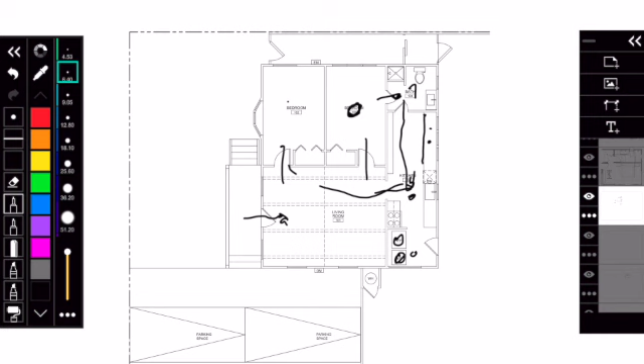So we're going to fix all of that, and here's what we're going to do. Let me make sure I can turn on the right layers here in the right sequence.

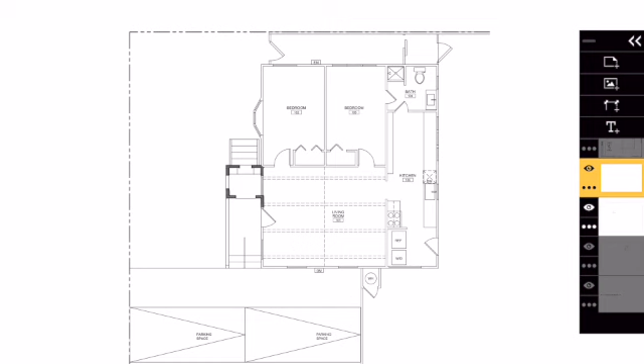The first thing we're going to do is fix the entry. We have a nice sized porch, and we're going to build out onto the porch a little bit and create an entry vestibule. So we'll come up the steps onto the front porch and right into the front door. The idea here is that there's a seat with storage on either side, so we come in, there's a place to dump the shoes and the backpacks and the keys and all those things, and then we enter the living space.

Okay, so that's the first problem solved. The next problem, let me do this in sequence... okay, found it. Here's what we do with the rest of the house.

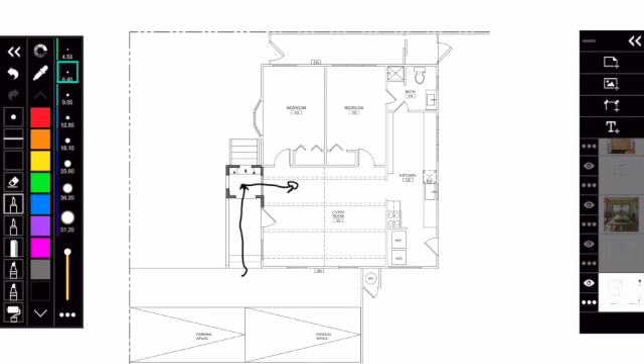We're going to bump out the back. If you see this pale blue line here along the back, that's the footprint of the existing house. So we're going to bump out this way, and we're going to bump out to the back. Fortunately, like I said, they have a nice size lot, and we have room to do this.

So working from the front, we come in the front door. This allows us to flow straight through the house to the backyard. We also took the bedrooms - again, this is the existing back wall - we took the bedrooms and the bathroom and filled up this footprint of space.

And we reoriented the bedroom doors, so they don't enter straight into the living room anymore, but they are around the corner, giving them some privacy.

So there's a little bit of a vestibule here between the bedrooms. You come in here, you can go to this bedroom - these are the boys' rooms. And then we also relocated the bathroom, which was previously up in this corner, and put it in the middle between the bedrooms. I'll get rid of this because this is getting messy.

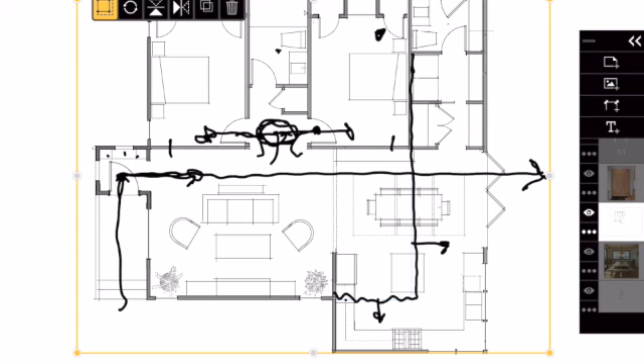Put the bathroom between the bedrooms. This gives a place where guests can use the restroom without having to go through the kitchen and dining area, and it gives the bathroom some privacy. I understand it's not a whole lot of privacy, but we're dealing with a really small house.

Even with this addition we're doing, we're at about 1,100 square feet. So we have a hall, bath, linen, two nice sized bedrooms for the boys, wardrobe closets, with a window seat in between the closets.

So let's look at the back half of the house. We've really cleaned up the traffic flow. We come through here, we can go through to the outside, into the bedrooms. This is the dining room, you can seat 8. Come into the dining room and also attached to a large kitchen.

So this is refrigerator, ovens, all work surface, cooktop. This counter actually has windows that wrap around the corner that come down to counter height, so all of this is view out to the backyard, sink, dishwasher, again all view to the backyard. Once you come into the living space, you can see out to the backyard through these folding doors and through the kitchen through these corner windows, which is awesome.

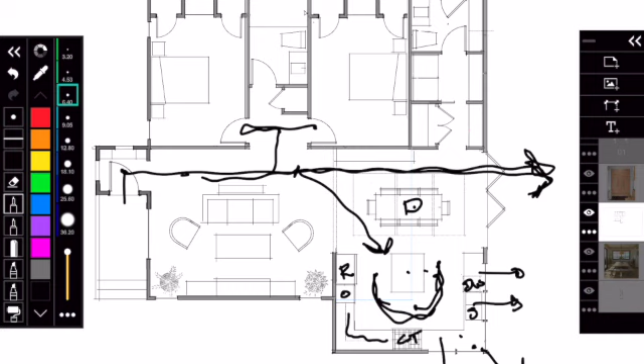And we get an island. If they want to, there's 4 feet here between island and work surface, so there's plenty of room for people to walk around, for doors to open from the refrigerator and from the cooktop. It's just a much more functional kitchen.

The other thing we did is this is pantry and full height storage here. So all of your kitchen pots, pans, food storage is right here, right across from the dining room, or right across the kitchen through the dining room. So pantry, full height storage. This is laundry with washer, dryer, and again storage here along this wall for detergent, cleaners, broom closet, that sort of thing. And this is a powder room, half bath, again with storage.

There's an existing outdoor shower right here. So when they come home from the beach, they come down this side of the house, shower off. There's hooks and that sort of thing for towels. And then they can come right into a powder room and change clothes. And then they come into the laundry room, dump all the wet stuff right into the washer, and then they're into the house.

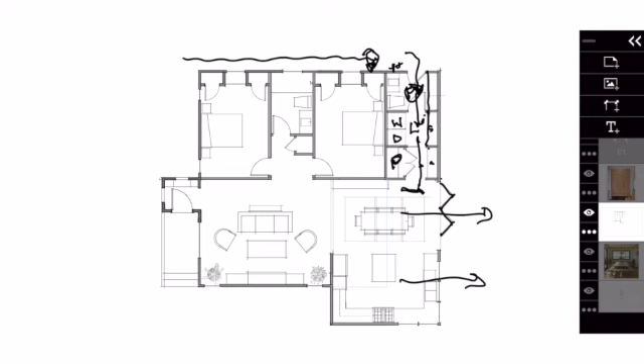And this is a large folding door system, so this all opens up to the backyard. Now then, I mentioned earlier we're going to actually add a primary suite, but they want to do that in phase 2, a few years down the road, save up a little bit of money and then do phase 2. So the way we're going to accomplish that is...

Like this. We lose the built-in storage that was right here, but we're going to come through this pantry area and turn it into a vestibule for the primary suite. So it's a nice sized primary suite. They have a Peloton and some storage for dumbbells and yoga mats and that kind of thing.

This is a king size bed. So again, we're playing in the primary suite with the corner window idea, same as we're doing down here in the kitchen. So there's view and access to the backyard here, view to the backyard through there, and it wraps around the corner.

It's a nice sized primary suite, room for exercise. There's two adjoining wardrobe closets here. They were very specific that they didn't need large closet space, so that's why there's no walk-in closet or anything like that.

And then into the master, or into primary, still calling it the master, into the primary bath. We have a trough sink, which saves on counter space for the size vanity we needed, and dual wall faucets, the toilet, and the walk-in shower. And then these rectangles are skylights above. You can never have too much natural light in a bathroom, especially the primary bathroom.

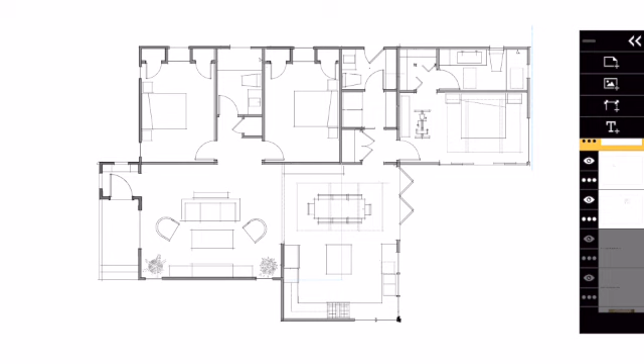So that's it. We've added about 500 square feet. It's a nice size addition, but this really solves the traffic flow problems. So you come in the front door. Here's a little diagram of the traffic flow, you can see it gets really clean to the outside, and this goes to the outside. Super simple circulation diagram, super efficient.

And that's it. This, again, in Pleasure Point, Santa Cruz, California, super common problem: 2-bedroom, 1 bath for an entire family. I hope you enjoyed it.